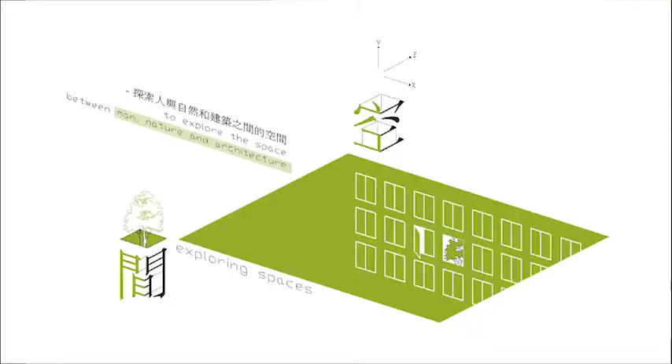Today I'm going to talk about 空间, which means space. Space is the basic element of architecture. To me, to design a space, we always have to study the relationships between man, nature, and architecture.

During my university time, we were all taught to design sustainable buildings. But this term has been spreading in the construction industry until today. How many of our current industry players have actually established this?

So to define sustainability, it is not just about reducing energy or waste. Sustainable buildings must be defined in a way that the people, the community itself who are inhabiting them for their living, are influenced in their daily experience.

For a sustainable development, the idea and concept of sustainability should not be confined to just the building itself, but should be considered at a larger scale, up to the neighborhood or even urban scale.

Throughout my architecture journey until today, I am still learning, and I am glad that I have participated in AYDA, Asia Young Designer Awards. Throughout the AYDA platform, I realized the importance of key design criteria, which are sustainability and always having the heart for the communities. These have been guiding me throughout my design development until today.

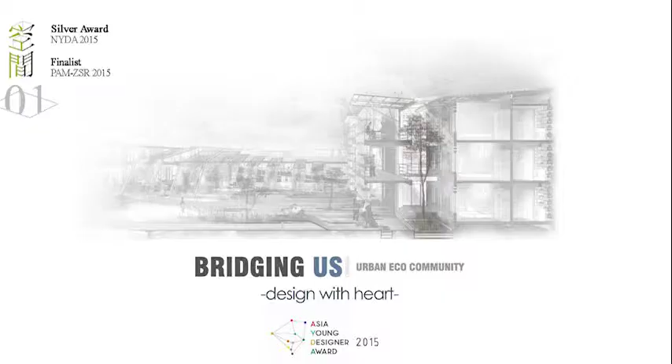Bridging Us, the urban eco community, is the first project that I'm going to talk about, which is also the project that I participated with during the year 2015 at AYDA.

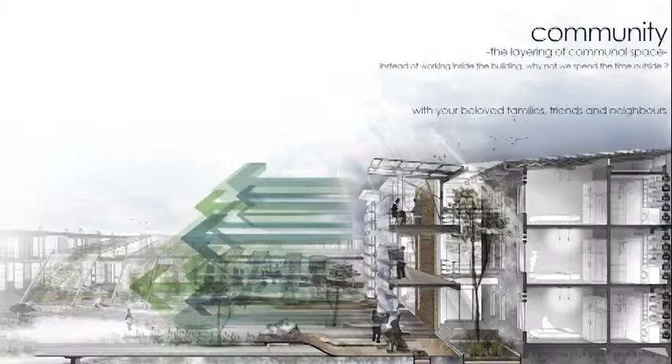It is basically telling a story of discovering an old industry, bringing back the memories of paper handmaking while engaging the communities with the natural environment. In the design proposal, the creative industry is where the community lives, works, and plays.

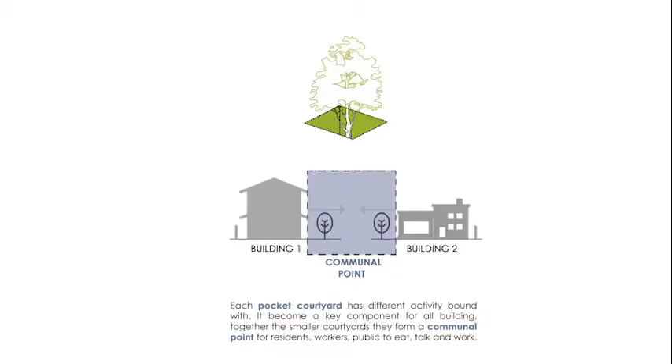The design is derived from different layerings of communal spaces. In the proposal, there are industry, residence, and commercial buildings within the same development. To prevent isolation in terms of planning, what I did is actually try to have every 2 units share a pocket courtyard.

Each pocket courtyard eventually has its own different function and activities depending on where it's located. As you can see, the pocket courtyard shared between every 2 units helps ignite the communal area and enhance social interactions.

The activity will further extend from the indoor towards the outside, to the central communal park. It is a space not only for the residents and workers, but also to invite the public to use the space to learn and chat.

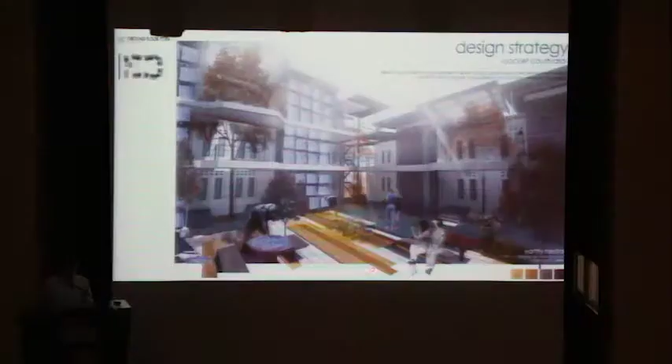As you can see, the rain garden and pavement in front of the pocket courtyards tries to create a strong axis towards the central park outside, which tends to bring people to work both inside and outside the space.

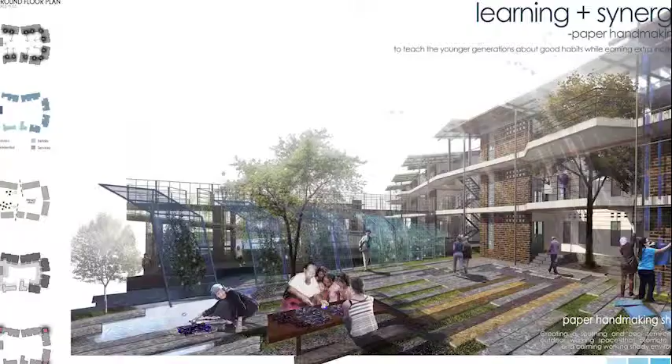The development also welcomes the public to visit and learn about this sustainable way of paper handmaking. This is a place where they utilize harvested rainwater for their paper-making process.

This is done in order to minimize the environmental impact, while working under these natural environment settings with their beloved communities.

These pocket courtyards, other than enhancing social interaction and bridging the neighborhood together, most importantly serve a second function, which is collecting rainwater for the paper-making process.

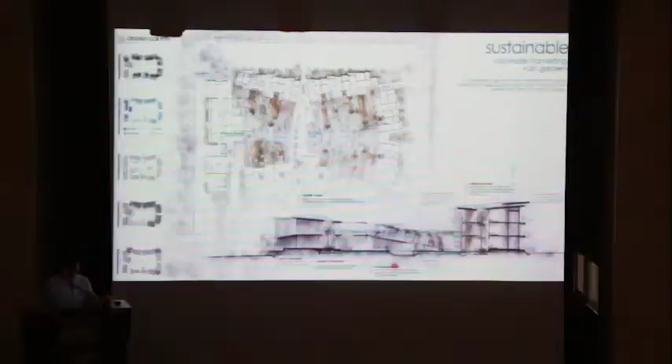Any water collected through this pocket courtyard will eventually go through filtration via the rainwater gardens below, and this becomes the water catchment area that will be used for their paper-making process later on. Any excess water will be collected here. So instead of using fresh water, we try to use harvested rainwater with treated water to replace it.

So as for the building facade itself, those handmade paper will be clipped and hung in front of their units. While it actually provides privacy for their shady communal spaces inside, it also helps to reduce the building's solar gain at the same time.

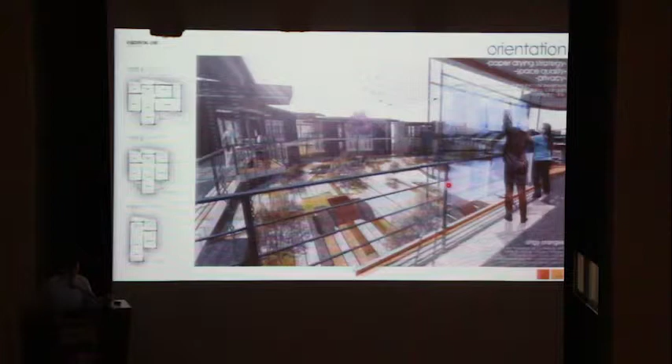This is the paper hanging system in front of balconies. The resident can pull it. It's introducing a very practical system where they can pull the rain chain, which works together with the trolley, so they can pull the rain chain just to convey the paper vertically without having to travel up and down.

After the paper is dry, this is where the communal balcony comes in, where they work with their neighbors. Eventually, if there are no paper activities, this is also where they interact with their adjacent neighbors and their communities.

So basically, this is a project about an urban eco-community. To me, this urban eco-community is where they work and live with their beloved families and neighbors while being able to engage with the natural environment.

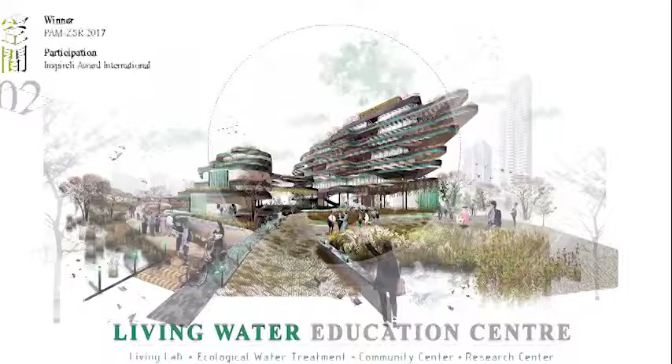The second project I'm going to talk about is the Living Water Education Center. It's also adopting the same idea where I'm trying to guide the project toward sustainability. But what can we do other than just sustainability? How can we define it?

In this project, the aim is to integrate both the built environment with the water and the green, as part of not only human needs, but most importantly, the contribution has to be back to environmental sustainability and biodiversity, which will contribute to our entire ecosystem.

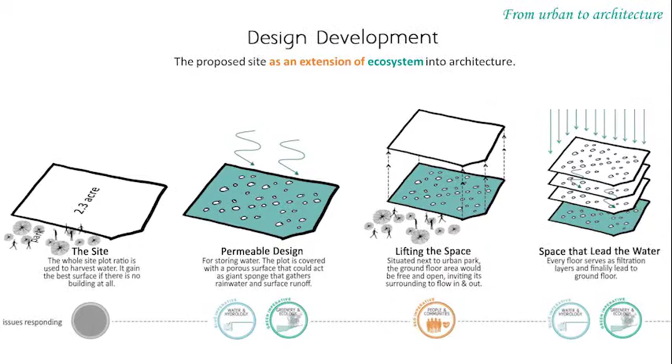A little bit of info about the site: the site has 2.3 acres. In order to integrate the blue and green as I mentioned, the site has to be a permeable design, so there will be a permeable design.

In terms of permeable design, the porous surface will become a giant sponge to capture the rainwater and surface runoff before they discharge to the surroundings. Because the site is located in an urban area, the surface runoff eventually becomes a very serious issue as it is highly contaminated. That's why the permeable design is applied to the site.

The site is also next to a future urban park. Therefore, the ground floor is designed to be openly welcoming for the surroundings to explore the space freely.

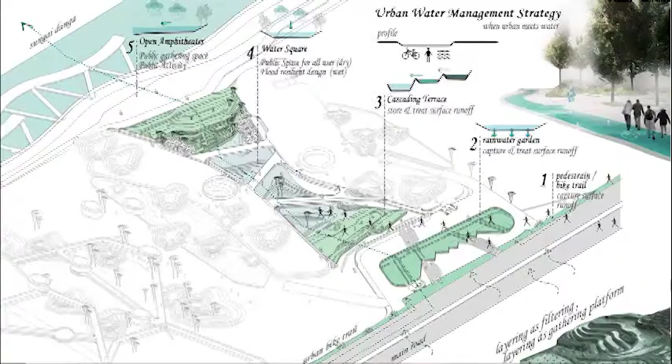As I mentioned, since the site is located in an urban area, the surface runoff is usually highly contaminated. The site also has information about flash flooding, especially when there is heavy rainfall.

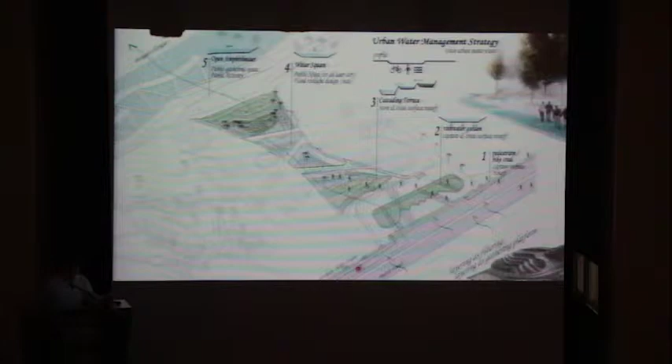During the day, the pedestrian path in front of the site leads people to the surroundings. But during rain days, this sunken lane, used for pedestrians and bikes, will convert or transform into a canal that captures the contaminated surface runoff.

This surface runoff will then be channeled to the nearest point - it could be a park, but for this site, a water square has been introduced in order to reduce the environmental impact and slow down the flash flood effect.

Before it eventually discharges to the surrounding rivers, once the surface runoff has been captured, it will go through a series of cascading terraces for biological natural treatment and temporary storage, and then it will be slowly discharged after the rain events.

That is why the water square is introduced to this site, in order to resolve the surrounding environmental issues. But other than environmental sustainability, most importantly, this water square actually contributes to the urban area with a healthy blue-green public space.

Meaning to say, during rain days, it will become a flood resilience design. But during dry seasons, this water square, with no water present, will become a cascading terrace for the public and surrounding communities to host activities or events.

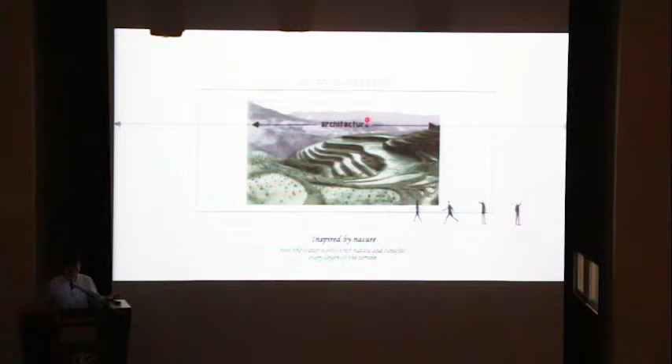Basically, the design is inspired by nature. For the terrains, the water actually works well with nature and gains benefit for every layer of the terrain. So in terms of architecture, why not try to integrate both water and nature into the space for a self-sustained ecosystem within and outside the space, or eventually our built environment?

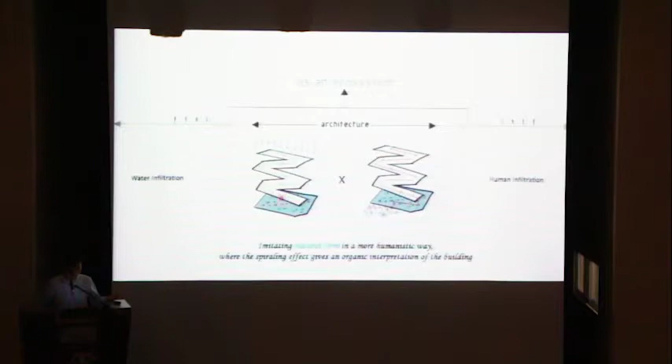Since the design is inspired by natural form, the space imitates this natural form where the spiral effect has started to give organic interpretations for the building itself. With this, you can observe that the layers and the space are interconnected.

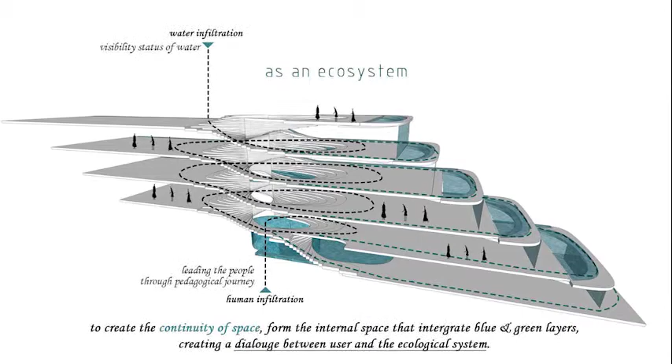With this continuity of the space, when visitors first approach the building, they are able to go through the spaces through a pedagogical journey. As they go through the series of spaces, it will start to introduce the process, what is the space that they will reveal to this water infiltration, because the water infiltration will follow the gravitational force from the top to the bottom.

When they visit, they will know that this pedagogical journey explains how the hydrological cycle works, and most importantly, to create an awareness.

Also, each different platform is not only interconnected, but they also try to integrate with the blue and green, both inside and outside as well, in order to create a dialogue between the user or visitor and the ecological system.

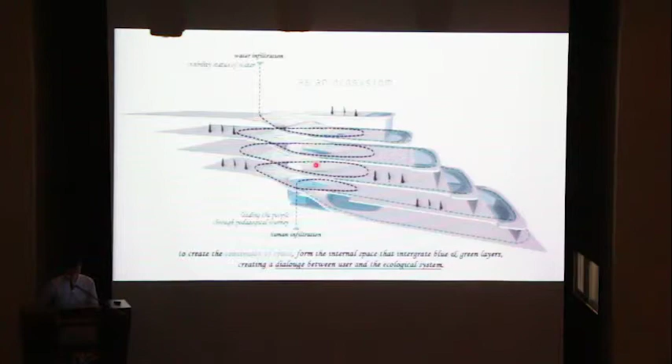The design intended to let the water flow, or we let the water in. That is why the design is cascading, in order to maximize the rainwater catchments. So instead of hiding all the water in a pipe, we try to reveal the process by converting them from pipe into spaces.

These kinds of spaces, we try to reveal for people to feel them. Through this cascading terrace, they are not only a terrace for the catchment, they are also a space. It can be a workshop to reveal what is the process.

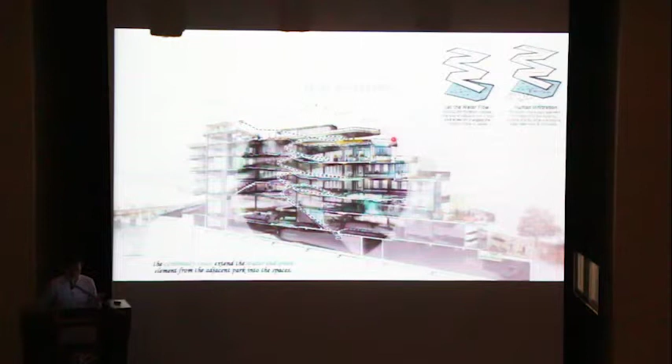In this new way, as we transform them into a usable space, the user is able to know more, to create an awareness and educate them by changing the water visibility status into where they can feel, touch, and even listen to the waters.

This outdoor terrace is not only to maximize the rainwater catchments, but it also intentionally utilizes the harvested rainwater, which is stored here, and eventually able to cool down the building - not only the outside, but most importantly, in Malaysia weather, we mostly contribute to the aircon. We are very dependent on the aircon.

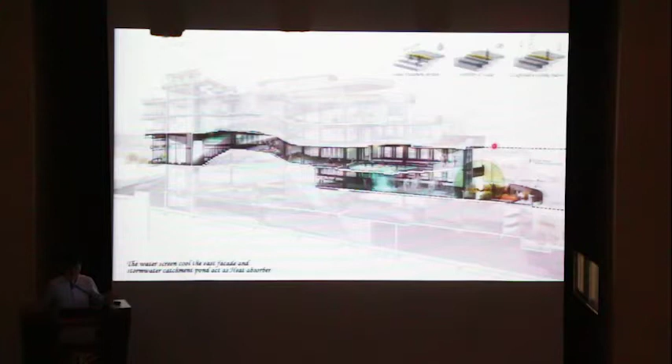But what if we are able to substitute that by using the natural element, which is water? It actually is able to, in a way, contribute to the sustainability of the surroundings. With these blue and green ecosystems, the evaporative cooling effect is also able to reduce the surrounding temperature, and it can reduce the heat island effect, especially in this urban area.

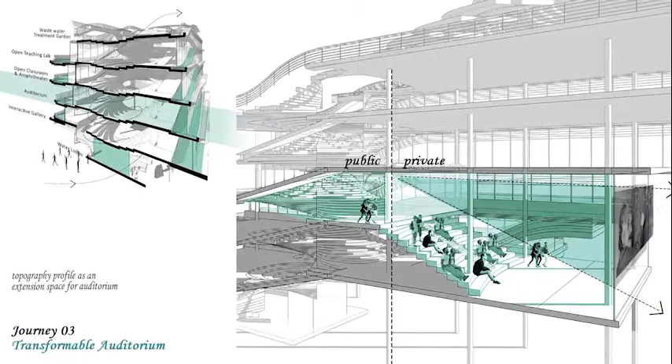Architecturally, the design tries to interpret the terrain form into a friendly space for the user. For example, this transformable auditorium - the extension of the auditorium can be done towards the continuity of the terrain above if there is any bigger function required.

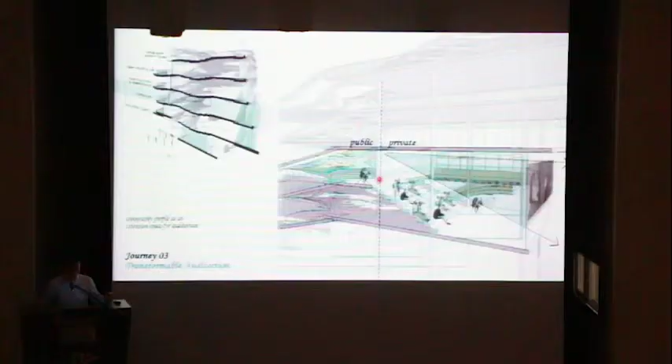These continuity spaces are not only circulations, but we are trying to interpret them into a usable space as well.

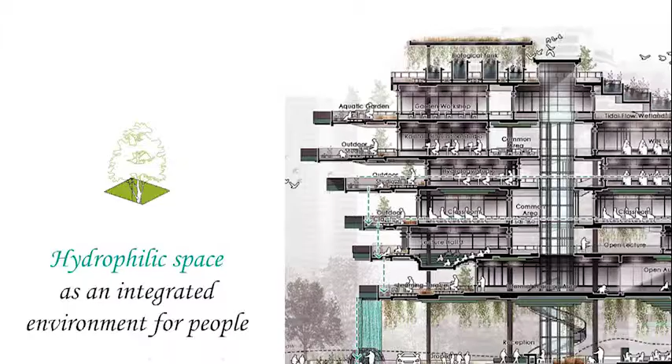Throughout the blue and green integrations, not only outdoor, but we're trying to bring them into the spaces themselves. As this hydrophilic space, it can actually provide an integrated environment for the people using the space, for them to work, to learn, but most importantly, in this environment, they can appreciate the environment.

The design is mainly designed to be open. This open plan design is intended to open to its environment, where the perimeter terrace surrounding the building, as on this floor plan, has become an extension of the space.

We're trying to promote users to use the space both inside and outside, rather than being confined into just a single room. This is to ensure the user using the space gets closer to the surrounding nature environment, even while they are using the space, without traveling.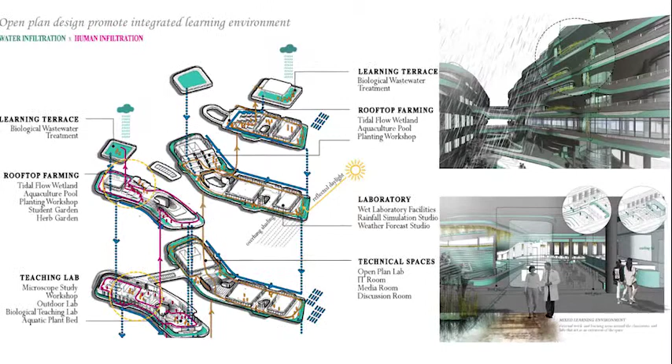So when there are raining events, this perimeter terrace eventually transforms into a rainwater catchment platform, for storage which is used for cooling purposes later on. And when there is dry season, this balcony becomes an informal extension space for the user to extend their activities, both inside and out.

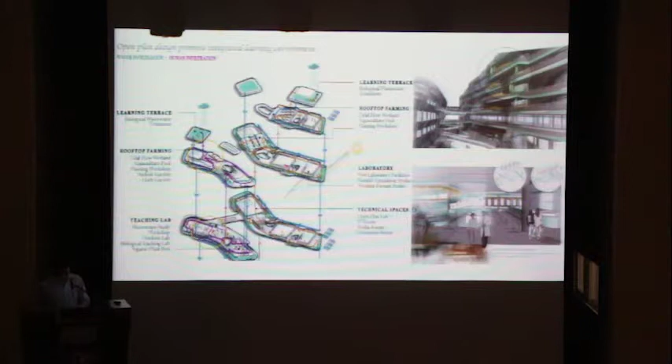So to me, it's not enough to create a sustainable building. Most important, the ecological aspect should be part of our human experience within the built environment.

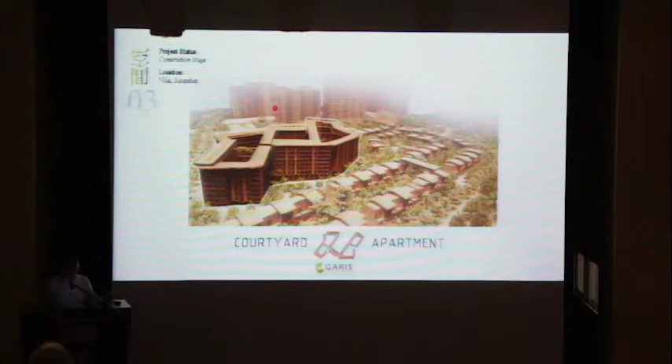So last but not least, I would like to talk about one of my current office projects from GARIS Architect. This project has just started construction two months ago, and I feel very lucky to have this project, as not many big projects are able to comply with sustainable features, and this is one of them. Let me introduce, this is Courtyard Apartments.

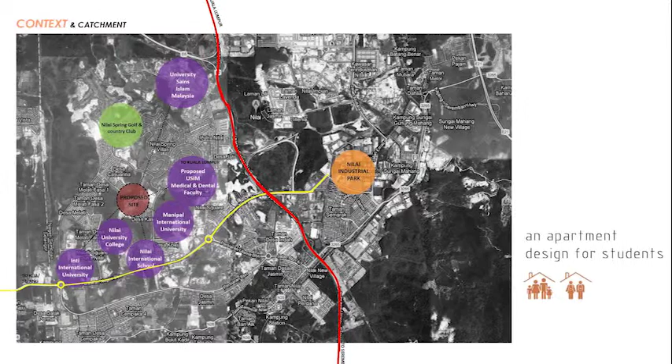This apartment design is specially catered for students. The site is located in Nilai, Seremban. As you can see, this zoning is mostly colleges and universities, and the site eventually becomes the midpoint to all these universities.

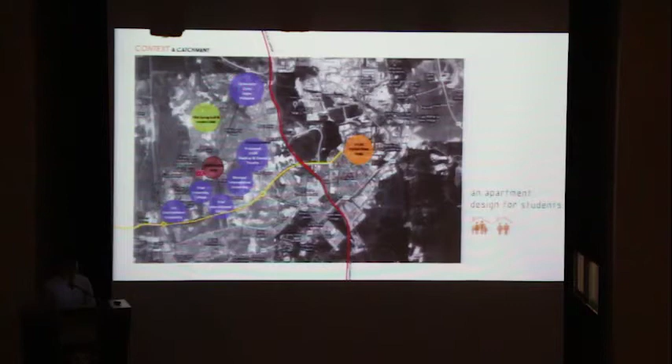So nowadays, most of our condos or apartments use the double loaded corridor, where you open the door and see another unit just in front of you. But this kind of corridor is usually only for walkway purposes, without any interaction with your neighbors. So in this design, we try to omit that bad culture.

Instead of a double corridor, we convert it into a single loaded corridor, so this circulation eventually becomes their interaction platform, and also allows for better ventilation.

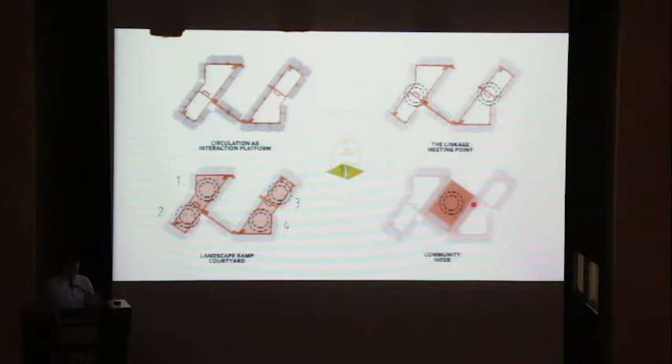The linkage at the center, or we call it a staircase, turns out to be a student's meeting point. As for the voids, there will be 4 different voids, mini courtyards, to cater to 4 different corners, and the bigger one at the center will be their community node. This apartment is trying to enhance student relationships and interaction by injecting student activities on the 4 corners of the mini courtyards.

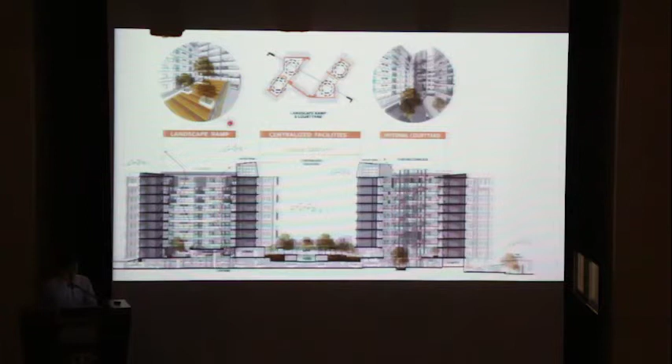So for example, there are landscape ramps at the internal courtyard, and eventually with these implementations, this courtyard also promotes an effective stack effect and natural ventilation.

So there will be four mini courtyards at the 4 corners for the students to have their activities for social and cultural exchange. And the interesting point is that since the project is located at the midpoint of all the universities and colleges, this apartment actually promotes bicycle use as the main mode of transportation.

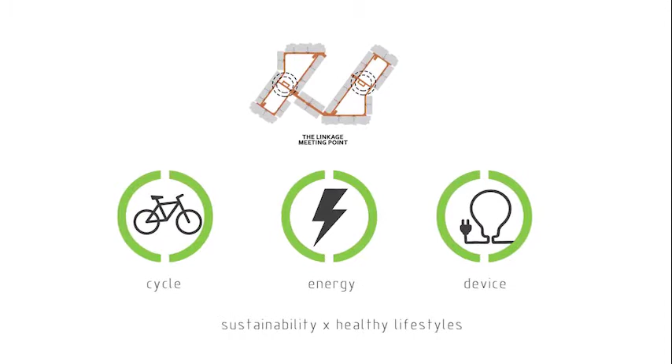So in this linkage, there will be a built-in bicycle for the students or residents to cycle. As they cycle, they generate energy, and this energy can then be plugged in for any relevant device.

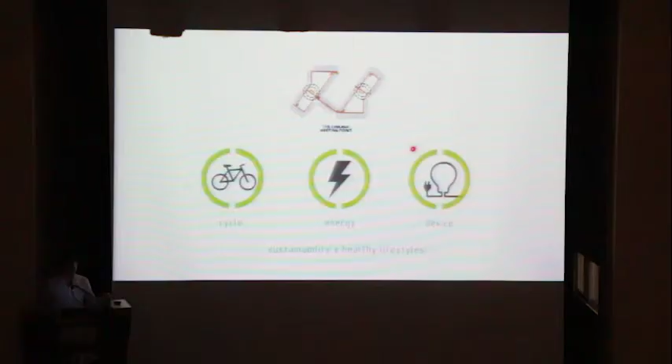So what I like about this project is that it goes beyond sustainability, to promote a healthy lifestyle for the residents and students within the community. It's also able to reduce the carbon footprint for the environment.

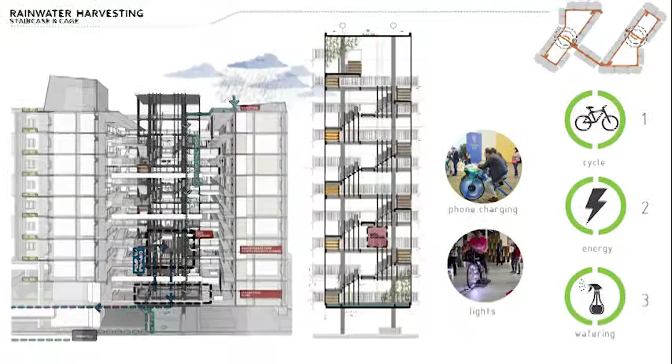So this is some of the intervention that has been done by the BGBG team, who we are collaborating with. They have developed the bicycle to charge your phone or music stations, and currently we are still developing the ideas with BGBG.

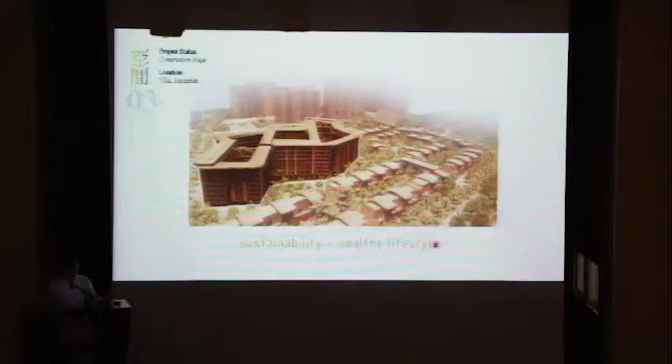So Courtyard Apartment is not only providing a space for them to live, but more importantly, it's a space where they can promote sustainability and also a healthy lifestyle for the community itself.

And lastly, I would like to conclude that sustainability is a criteria that we should consider in design developments. So of course, it is not only about sustainability itself, but we as designers must always think from the perspective that it always has a contribution for the communities, and always have a heart for them, where the community is able to experience the space every day. And in return, this sustainability can actually create a healthy lifestyle and balanced biodiversity for our built environment. So thank you, Tulani.